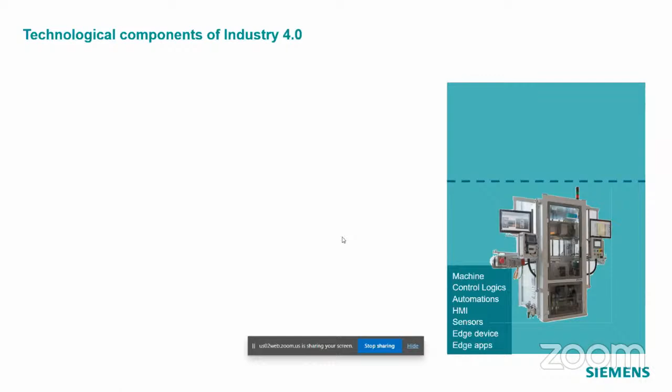We put sensors so that we gather the data - a very simple one can be vibration data, temperature data, or alignment data. There are different kinds of sensors available catering to different requirements. The sensors, when they capture the data, the data needs to be processed, otherwise there is no benefit of capturing this data.

So there is a term where I can collect this data through sensors, and there is a cloud concept. I can collect that through some device and stream it to the cloud, where a lot of apps are sitting, which will analyze this data and give me more insight into my equipment.

But now the thing has come - I will get the trends, but suppose I want to make use of this data and take certain critical decisions near to the machine, maybe on the machine itself. So I will use my pointer - you can see this is the edge device in this particular equipment. It's a data streaming and edge device sitting here.

So you identify your decisions - some decisions critical to the machine should be near to the machine, and some data will be used for the trend. Suppose I have the same equipment on 5 ships, I will collect from all 5 ships and map those equipment performance to find out the trend and take corrective actions.

So some decisions you have to take here, you have some computing device here, on which you can select data which should be less in size, because you can't put a mainframe or big computer here. So you have to balance between computing power and KPI - based on that, you decide how much data you will collect and what kind of decision you will take there. So sometimes when people talk about a digital twin, they only talk about this, which you can say is a data twin - a twin created out of the data which is produced by the equipment.

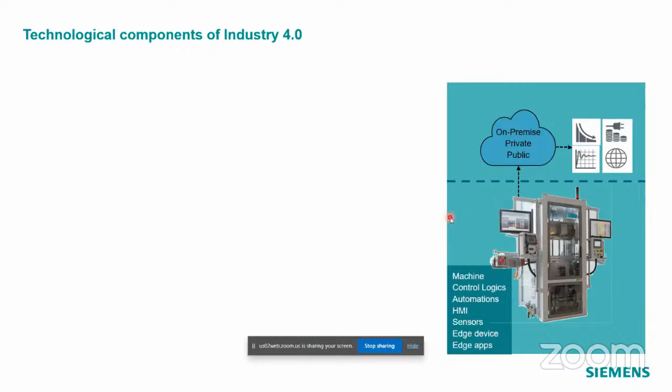Similarly, same equipment - as a manufacturer, as a shipyard, I may also be using many machines like cranes and others. So the same technology I can apply there. That is one part of it.

The second part is, if I have this 3D model available, there are 3D planning tools available. We call it virtual planning. So you can do process simulation and see whether the reachability is enough or the posture is good enough.

With this posture, how much a worker can do, and there should be rest for a worker because there is fatigue. In our case, a welding posture of an operator is difficult because of the nature of the compartment, or there is not enough exhaust available, so you have to plan that after every half an hour he has to come out.

All those kinds of process simulations you can also do. So this is basically your data twin, this is your manufacturing twin. And the last is basically my design twin, engineering twin you can call it.

Engineering twin is because today we are not talking about 3D static models. Now these models are mimicking the behavior of actual machines. How could they do this? They do this by leveraging different kinds of simulations.

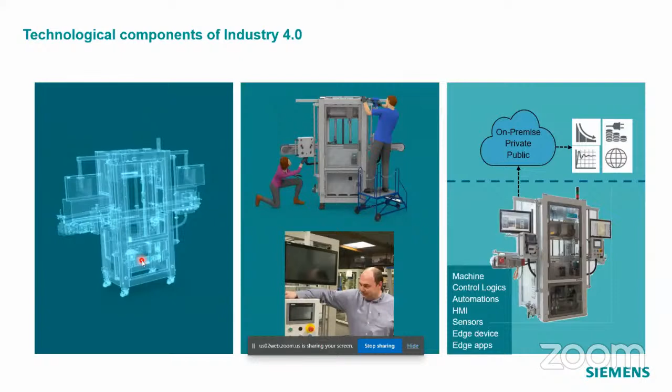Simulation software has become very strong, they have become faster. There is also a possibility to run multi-physics together to understand - instead of running physics solutions in isolation, now you can run them together like a real-time environment. So now these are not static, they are becoming dynamic, capturing the dynamic behavior.

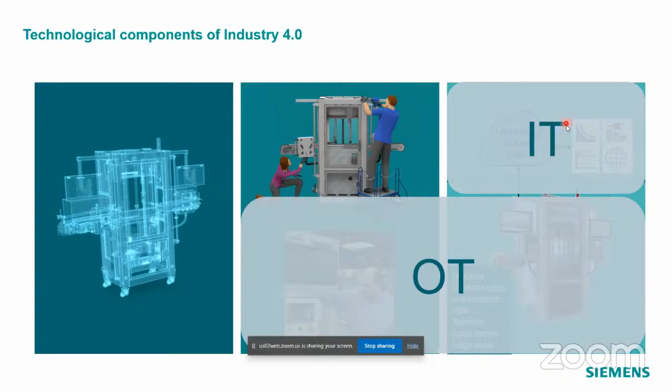Overall, if you look at the bottom part where we are talking about machines and capturing data from machines, it is all about operational twin. The data which you collect on cloud and process - this is called information twin. And your virtual planning and the rest is basically your engineering twin.

So now twins also have a variety. Many people are talking that digital twin only from data doesn't help, because it gives the behavior of the current system. But if I have to do what-if analysis, let me give you a simple case.

Suppose you have a system and a particular pump has now gone bad, and you don't have an exact repair replacement in your stores, because our vessels are designed for 40 years, 50 years. Over time, things have changed. Now I have to see some other part in the market, some other pump which is close to this spec. If I put that into my system, how will it behave?

The data twin has a problem there. So then the engineering twin comes into picture. Since you have an engineering twin available, you can replace that pump.

You put this pump, put all the behavior given as spec by the supplier, and then put it inside your system and solve the complete system to see what will be my performance envelope after putting this pump. With that, you can put a new SOP for your operation team. So that is the way the engineering twin's role is increasing now into a digital twin space.

I hope I tried my best to explain this thing, and then I will take some of this engineering twin pieces and operational twin pieces and IT in the subsequent slide to give you more insight into it.

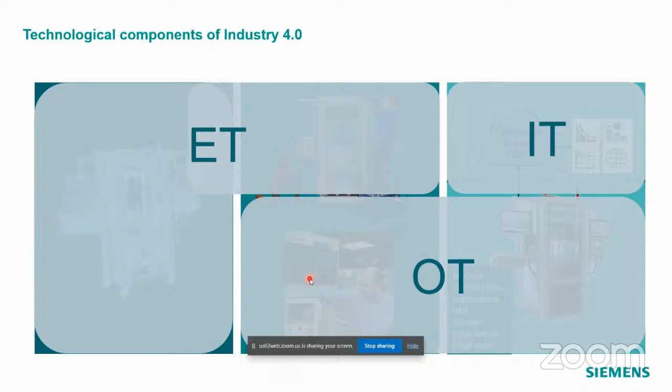Once it comes to Siemens, we see the whole digitalization game is based on collaboration. If you don't have a collaboration platform, we are digitalized today as well. So the first thing is the collaboration platform which we bring in, on which all the tools used for virtual products.

It can be a design tool, it will be a 3D model, it will be a 1D simulation tool - I will highlight 1D simulation tool in a couple of slides, maybe CFD, structure analysis. So all this thing will go as an input for your virtual production.

Since I'm running this complete thing in virtual production, there are certain observations which can be sent back for verification and new specs can be released. This is all in the virtual world, so I'm not yet invested in my physical thing. So till the time I'm in the virtual environment, I can make changes with less cost. Then once it is proven, it goes to real production.

Again, there may be some issues and validations, and then I have to give the new commissioning process. As a result of this real production, I'm basically delivering my actual product to the industry. And this product will also have certain technology which I have used in real production, like AI, ML, and these things, because finally the solution is womb to tomb, which is most commonly used now.

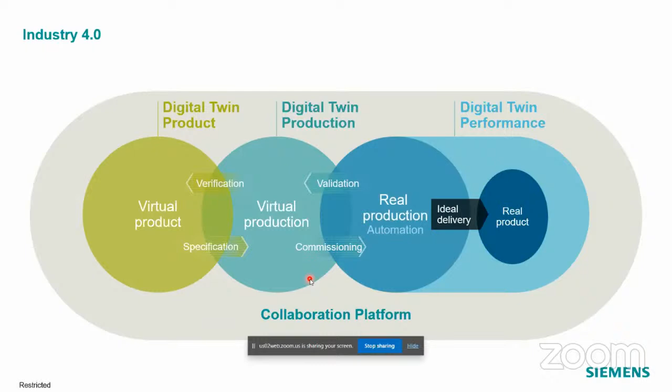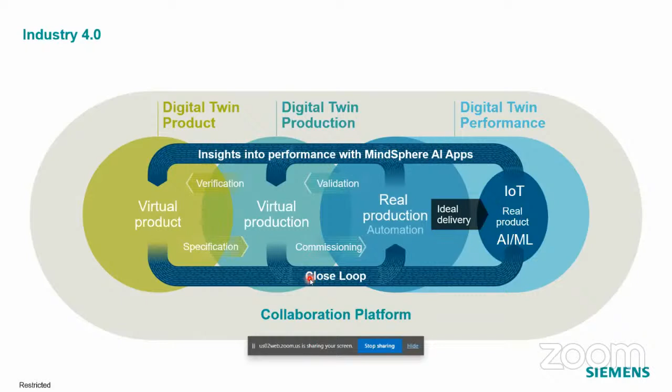And so on this, I will have this data highway. It's giving me a closed loop environment. So that is the vision. Let's decode each area, okay.

So when I say collaboration platform, there are different—this is just a suggestive list of solutions. Document management, these things we already know, program management is there, data management. Material management is basically—now many of you may be knowing that...

I use the term womb to tomb. So when it is going for scrapping, you should know how to handle this material, what kind of hazardous material was used at the time of construction. So that information throughout the life cycle you have to maintain, and that also you can maintain on this collaboration platform. So it gives more control on the program, visibility, and collaboration.

So post that, virtual product comes into picture, where we all know that ships and marine vessels are very complicated. They have, by nature, by beginning, a multi-domain engineering, and those domains are increasing. So it's mechanical, electrical, electronic, software, all hydraulic, pneumatics—so there are so many kinds of systems there.

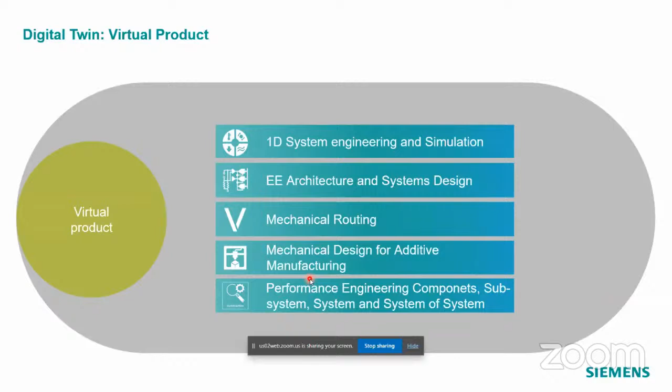Okay, so all this will sit on this collaboration platform, because they are not isolated—the need is to connect them. Okay, so how a typical process works in design, that I have tried to capture here.

So it starts with basically requirement. This collaboration platform gives you a way of managing your requirement, because your requirement goes through so many iterations during the concept design and the basic design level, that for a complex program it really becomes tedious to find out when changed, what changed, and why changed. So all this can be maintained here.

From requirement, our experts work on the system breakdown. So now there's a tool to create the system breakdown, and there's a tight integration between requirement and system. Tomorrow, if your requirement is changing, you can trace out which particular system will get impacted, or multiple systems will get impacted because of this requirement change. That's the value—we are moving from manual process, so there is a tool to take care of it.

Once my system elements are finalized, I have to size them, right? So in system engineering, here we use a tool which I will touch upon in a little detail because it is interesting—it is called the 1D simulation tool. Because our systems are, as I mentioned, multi-domain, it has all kinds of engineering here.

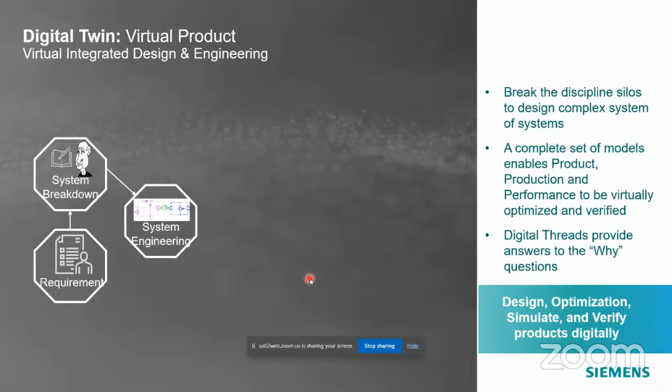So we want a tool even before investing in 3D, because 3D is the luxury. At the basic design level, I have very few information; at concept level, even fewer information. So how to leverage technology to have better bidding, to win the bid, we have to be accurate technically, so that we can estimate things accurately.

And once my system engineering is done, where I have done all my parameter sizing, I can take that into different 2D development solutions, like piping schematic can be developed, electrical schematic, and the concept level design of a ship. So I will talk about it.

And then all these things travel into detailed design, because finally we have to create the hybrid BOM composites, where all this—outfitting, structures, piping, electrical—everything is coming together. And as you build more realistic 3D data, in parallel you can have magnetic field interference analysis.

Structural analysis is very common, industries using CFD. Probably I can do certain testing virtually.

So on this platform, the typical problem is when I have a system which has 10 components—2 may be internally designed, 8 I have to source from the market, but their receival at the shipyard happens at different times. So when I'm receiving at the factory, I only test that equipment, but most of the problem comes when you're integrating this thing together. So with virtual testing, what I can do is 9 components can be virtual and 1 component can be actual.

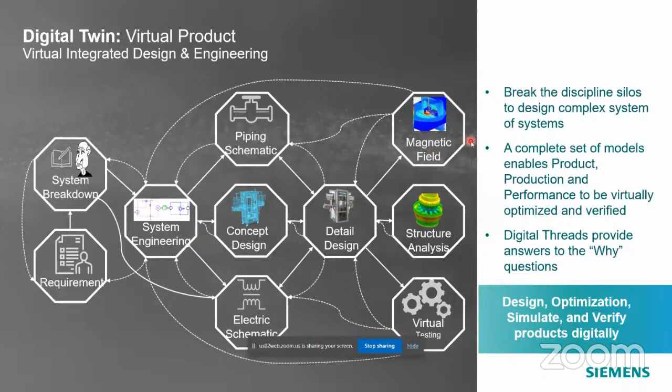I can put all the sensors and do this hybrid testing, so I'm testing the individual equipment as well as maintaining the testing at the system level. That is the kind of technology I can apply, and all these are connected through digital threads. Every asset is traceable right from the requirement - I can see which system is getting modified, whether parameter sizing needs to be redone, where it got consumed. From this consumption I can check which analysis I have to rerun and validate that behavior. So it's complete traceability you get out of this.

So let me take one small case. For this 1D system, we have a tool called Amesim, where you have a physics model and a library of all this. I can have a basic resistance model of the ship, a propeller, transmission, and a mission profile. Very detailed engineering is there - I will give you a couple of glimpses.

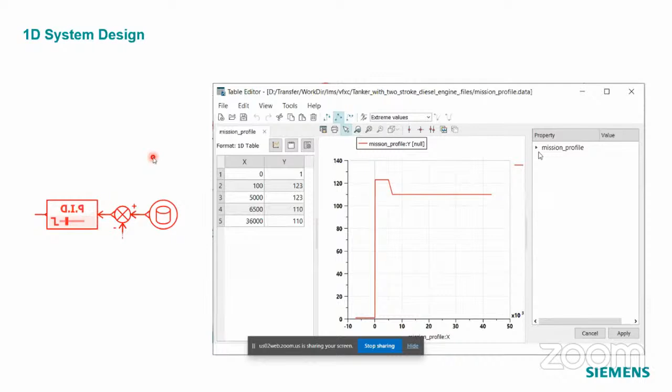So this is a mission profile. Any testing has a certain mission, right? So I just go full throttle and then come down a bit and stabilize. This is the mission which I want to run. This is basically your control system - what plan you have to test. Based on that, you will decide your mission.

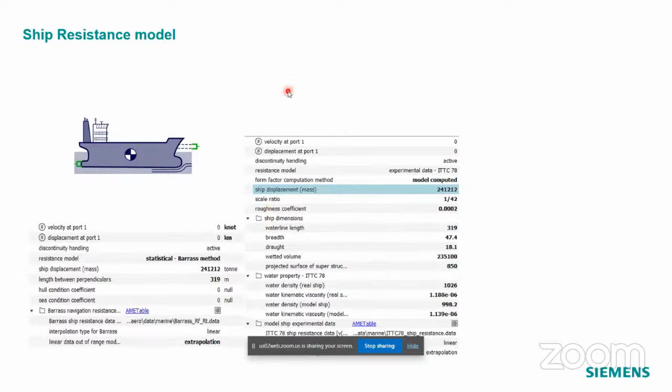Then, as I mentioned, I don't have any 3D model. But there are certain physics models available, like the statistical Barras method, where I just give the tonnage and the length between the perpendiculars, and it gives a fairly good result. Or if I have more data, I can go for experimental data - the ITTC 78 model is available out of box in our tool. Or with more information, the Holtrop and Mennen model, where I can define bulbous bow and all these details depending on where I am.

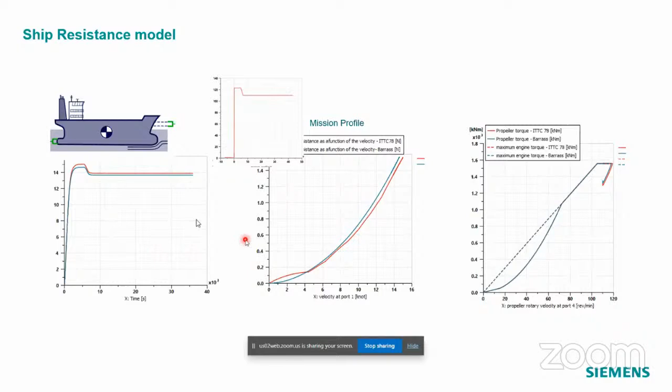Similarly for the propeller, I can create a virtual disk, or a Wageningen B-series based model, or a performance based model if I have all the coefficient values available. If that's not there and I have actual propeller test data available for the same propeller I'm going to use for my next ship, I can even take that tabular performance or graph as a performance propeller model. So it's a very flexible tool.

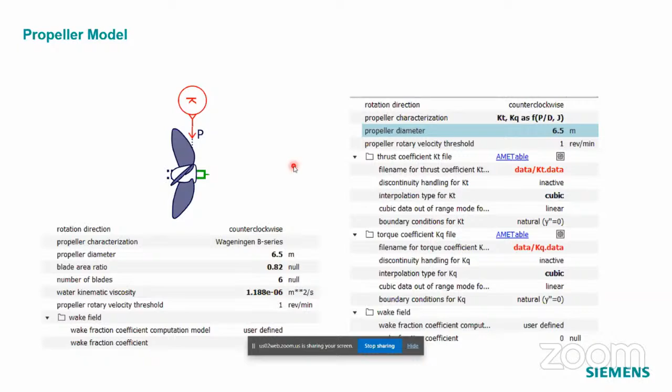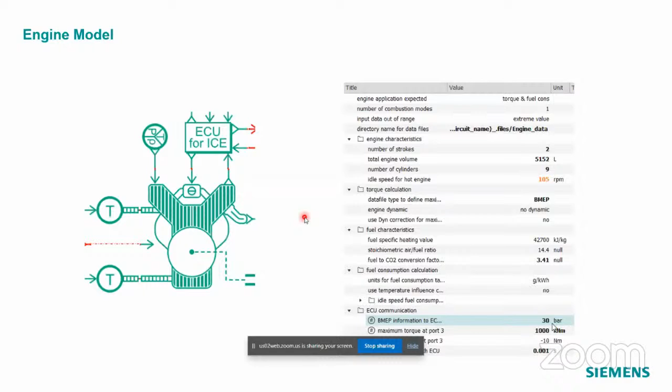Same way for the engine - you can define a very detailed engine with a complete mathematical model. With this I'm putting everything together, connecting them. There's a mechanical system transmission, these are all signals, there may be some hydraulic components. I'm showing you one example, but you can build any kind of system in this tool. With this, you can size your components - that's the value we add.

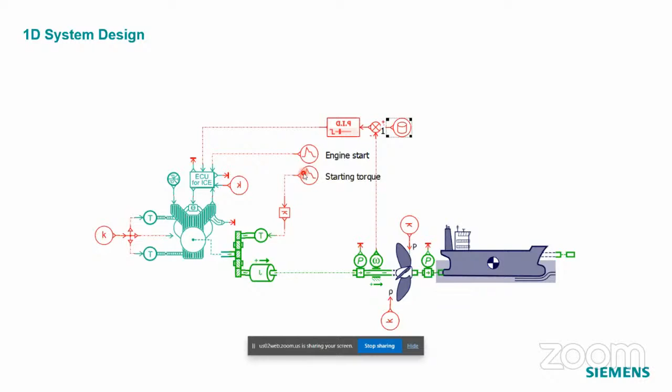So once you have solved that, you create your hull surface. This hull surface can be parametric, for the parameters which you want to play with. Today these things are done by our experienced naval architects, purely based on their experience. But these are the tools which will help naval architects try more options. I can try that with different models - with one model I'm creating hundreds of options, and I can plot them against the constraints.

So we have an optimization engine called HEEDS. One thing I want to make clear - Siemens solutions are all open solutions, but I'm using all internal solutions here for designing. I'm using NX, Star CCM is a Siemens solution, and HEEDS is also Siemens. But if you have other solutions, even those can be integrated - our optimization tool integrates 128 tools.

So there's a model which is getting modified, taken into Star CCM for validation, and then it's plotted. With this, you have more options to choose from for the optimum design.

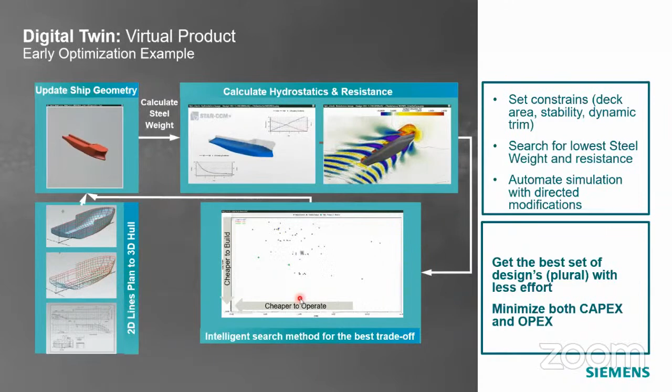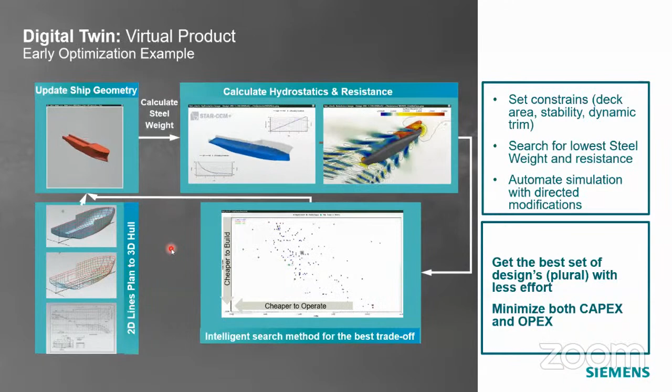Best design you can't choose because there are so many constraints you have to balance. So this is one example in the design domain of how this connected technology is giving you more value out of the system.

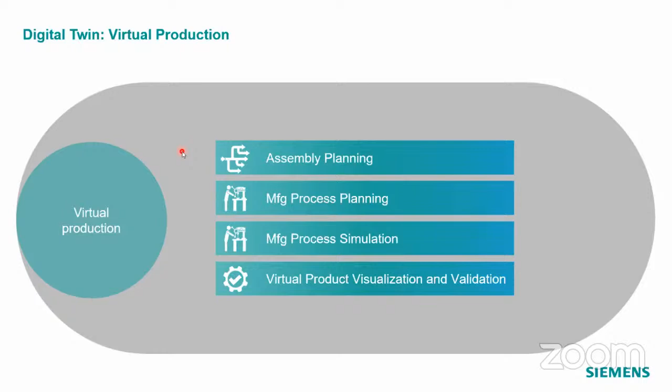Next example, I will take virtual production. This is one area where some of the big shipyards have taken the lead. There are so many things which we do today as Excel sheets or ad hoc processes. There is a process because by experience you have gained knowledge, and based on that knowledge, SOPs have been created and the systems process has been created. But how can we use the technology here? In one slide, I will try to explain.

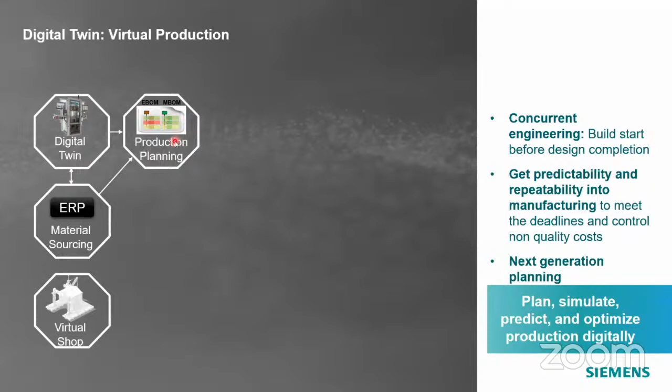I will show one example here. From the digital twin, I get my engineering BOM. From ERP, I get the material status. But for MBOM, that is manufacturing BOM, you may call it palletization or creating volume creations. You break the complete structure into small volumes, maybe fabrication volumes and assembly volumes. But you want to track, like, what component of the engineering BOM got consumed, where it got consumed. If it is changed, you can trace it in MBOM, which particular manufacturing sub-assembly got changed. So this traceability comes into picture.

When this package is done, you will be creating your steps, manufacturing process, bill of process, where you define for doing this, what drawing, what 3D model, what material, what machine, what man, what skill sets of man are required, what tools you will consume. So all this detail is packed here.

Now, not for every packet, but maybe some complex or heavy packets, you may have to do process simulation. Process simulation can simulate man, it can simulate machine. You can see how I will lift this particular object, take it to another position, what kind of time it will require. All this analysis you can do. If it is heavy manual labor, as I spoke about the welding posture, this particular tool also checks the stress on the human being, the fatigue on the human being, and with that you can create very safe processes.

Once this is all done, I will create my manufacturing schedule out of it. Now the schedule is ready, all other information is there. I can load it. Other important thing is the build sequence. We all know that the build sequence is very important for us. Once this is done, I can load this schedule on my virtual shipyard, and I can run it virtually.

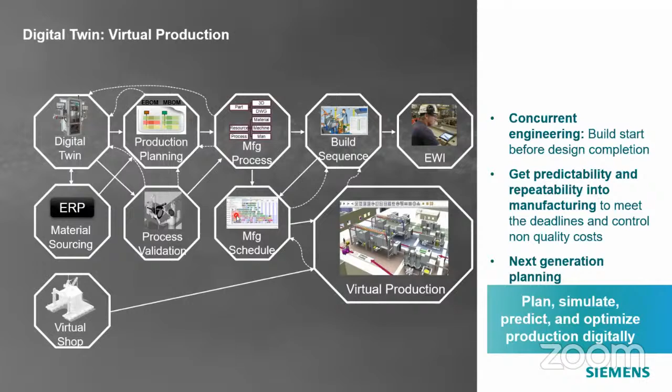And since you have created so much data, with this data you can very easily create the electronic work instruction, which can be loaded on a tab, and people can use the industrial tab in the factory to execute the task. And again, it is all traceable down to the digital twin. So suppose there is a requirement that triggers a change, that can be traced up to any location in this, whether it has an impact on the manufacturing process itself, you can understand that. So probably it will give a way to bargain better with your vessel owner or the contract OEM for the cost of the change.

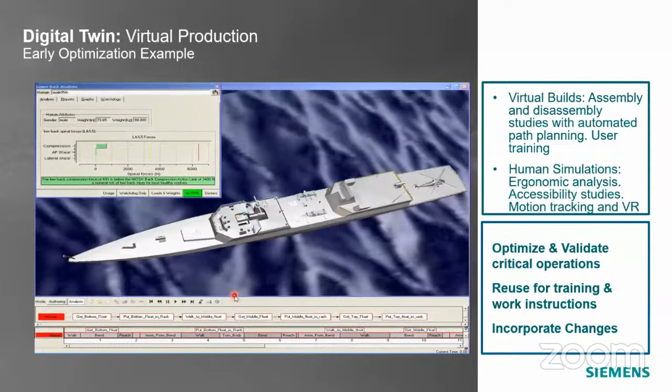This is one example I just wanted to show you. It is a simple example, like a lady and a man, they are doing some work.

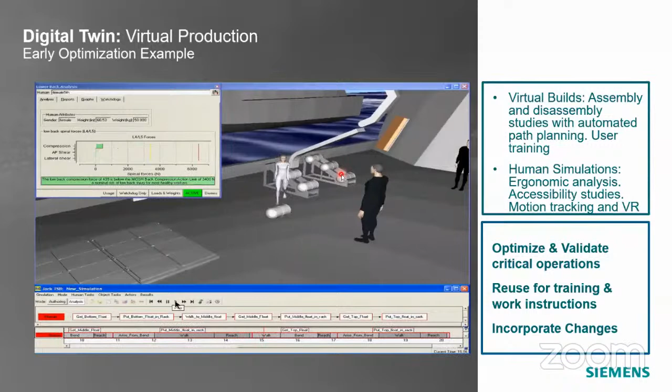This tool helps find out what kind of load is coming on the body. When a tall man is lifting, there is compression in his spine. The same work done by a woman, who is smaller with less height, shows she is not finding any problem. This way you can find out what kind of percentile or skill, or how to make this safe by changing your process. This is just an example to show the capability of the tool.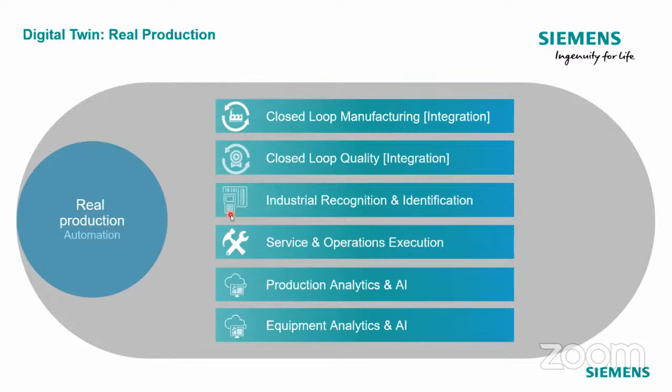Once you're done with virtual production, the next stage is real production. Here the technology we use is closed loop manufacturing and closed loop quality. There is so much inventory lying around that traceability itself is a big task, so we provide a solution for industrial recognition and identification with RFID scanning, whether it's metallic or other things. This enables service operation execution, and with this data I can run different types of analytics on equipment as well as overall production.

One area I will explain: your schedule comes from planning, but when you are executing, new constraints appear. Many people who have worked in the workshop can relate to this. Every time in the workshop we have different kinds of constraints, and we have to solve and see which other activity we can take forward with this constraint. So we have a solution for that, which is a critical chain based solution.

Now you have an execution plan available. From planning schedule, you have created your execution plan, so you can load the operation onto manufacturing operation management, which can be used in manufacturing execution, whether it's man or machine, depending on the requirement and the kind of systems you have. This can be decided, and the kind of information you want to capture, right from human to machine, can be planned accordingly. There is also a quality plan already published in the operation management.

There will be inspection stages, and once you close them, depending on what kind of constraint you want to put, like if all the quality parameters match, only then should it go to the next stage. All this kind of planning can be done here.

On top of that, we have a manufacturing intelligence engine, which based on the KPIs of that particular department, can create different dashboards to give a good understanding of the whole operation, which is very important because it's such a complex environment. We should know what our focus area is and how we are doing against that.

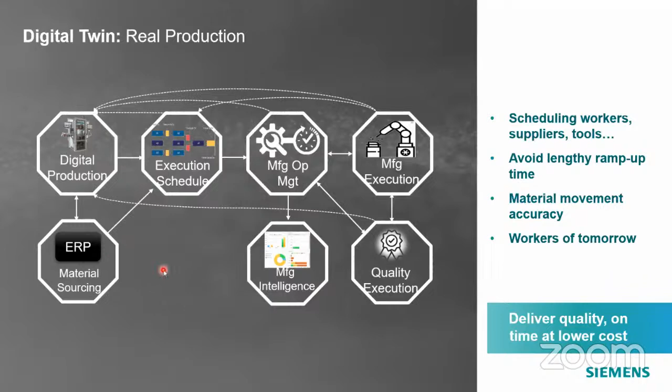These are the solutions we have for real production, and again it's connected to design. For example, suppose we are parallelly doing two ships. Now a change has come. With this connectivity, I can find out I can't change ship one because it's already executed there, so this change is only available for the second ship. Maybe I have to talk to the OEM that it's already done, and if they want to execute on both, then I have to rework. There may be a decision to leave it wherever it's already done, but modify the other ship. So all this information can be captured real time at the moment of making the change decision.

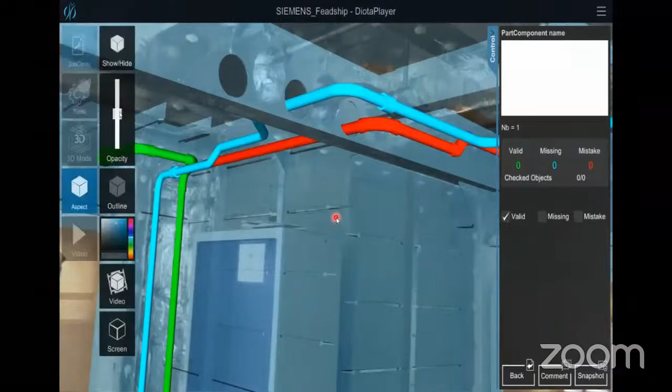One example of virtual and real world, this is something we did for Feadship, one of our clients. You can see this pipe - it's a virtual pipe, and he is standing in the actual structure, because structures have a lot of tolerances due to the nature of welding activities. Before bending the pipe, he wants to see whether the design pipe will fit inside, or if there is fouling with the cutouts. Here I am merging both virtual and physical worlds together by superimposing the virtual pipeline onto the actual structure.

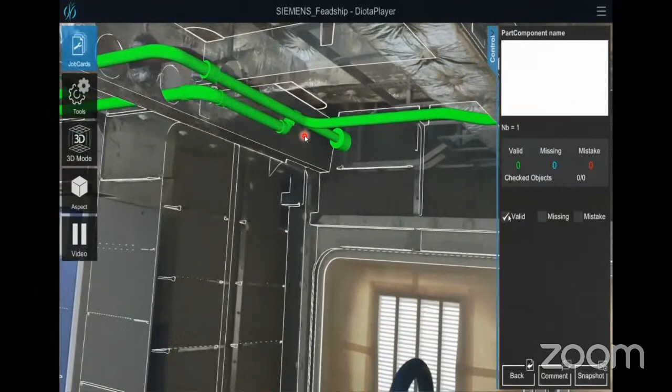There is a company called Diota that Siemens worked with and brought out this solution for that customer. I thought this was interesting to see how these two worlds are coming together - one application of how you can do this.

As I told you, there are a lot of technologies used in your actual production that can be applied to the real product too. Analytics can go there, and Industrial Internet of Things is common - you can apply it on your machine as well as equipment given by supplier, or things developed in-house. The supplier will give only the equipment level sensor system, but as a designer or design house, I have to give the system level solution, adding systems on piping and other components.

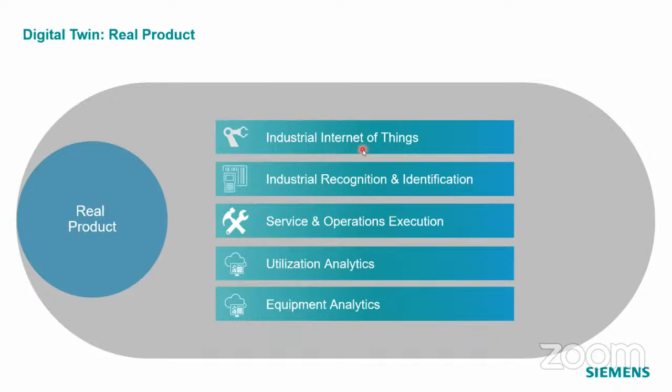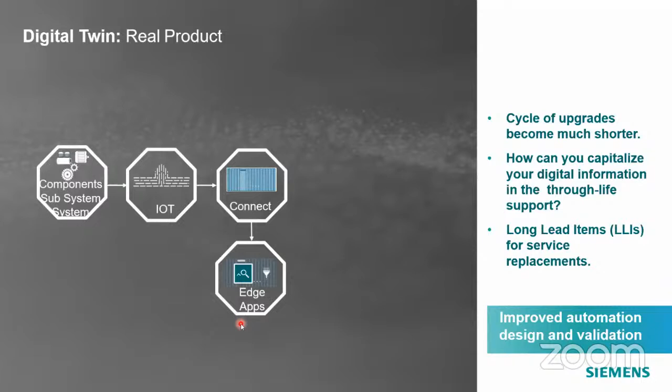So how does it work? You have all your equipment, your ship, on which you first put the IoT infrastructure, basically connectivity, and then there's a data gateway where all the data comes. Some data goes to the cloud, and some comes to the edge app on the ship. There are a lot of options based on requirement - if it's a defense ship, I don't want to stream my data outside, so I segregate non-classified data. I can create a hub inside the ship, on the machine, on the ship, or on the cloud, depending on the KPI, and different apps will give different insights into my system.

Since I'm collecting the data, predictive maintenance comes into the picture. Predictive maintenance is a very small part of this solution - there's a lot of other value coming out of it. Service lifecycle gives value by making sure I don't replace parts before their life is over. So instead of time-bound replacement, I can move to a model which is performance-based replacement, which reduces my service cost. All these possibilities are there.

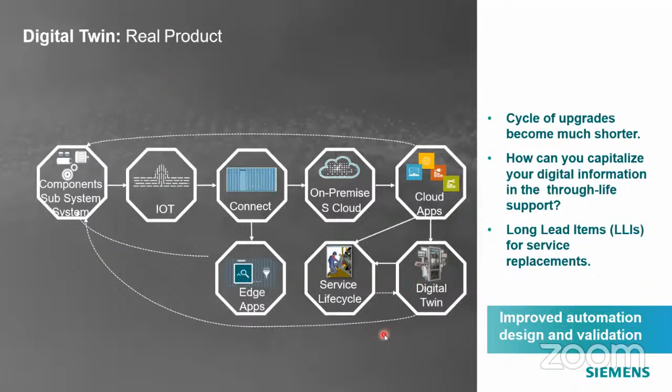This is the scenario I was telling, that pump story - like this pump is not available, so if I have to put a new pump, I should know the impact of that on the system. All these things work together, and using that I can give you better prediction on this.

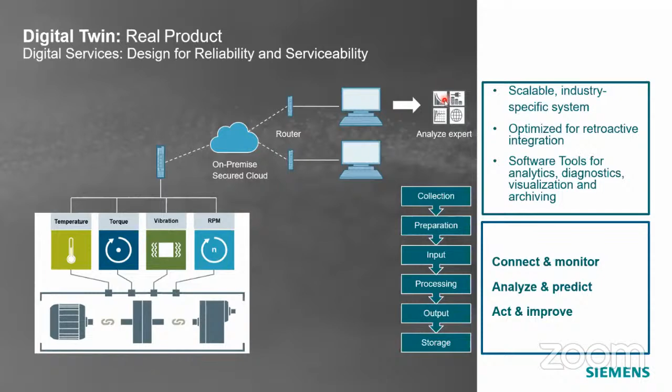This is a little inside look at how we process the data. These are the equipment where various kinds of sensors are, there are many more - these are representative ones collected over the cloud. Then there are processes like collection, then we prepare that data, input is created for further processing, output comes which is stored, and this output is connected to different plots. This is the way the whole IT twin works.

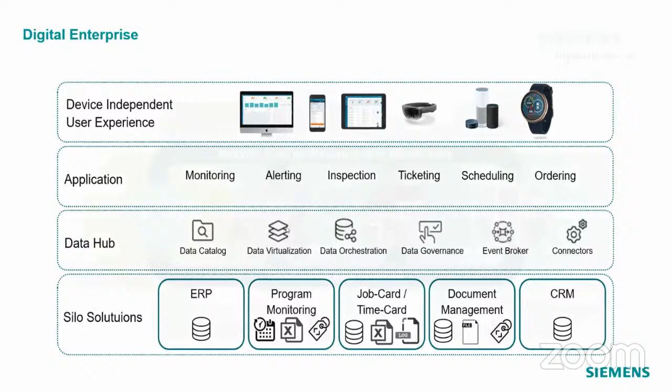So this is digitalization. This is Industry 4.0, which talks about bringing things together for better insight, and this insight will trigger the next level of efficiency in the market. So that is the point I wanted to communicate today.

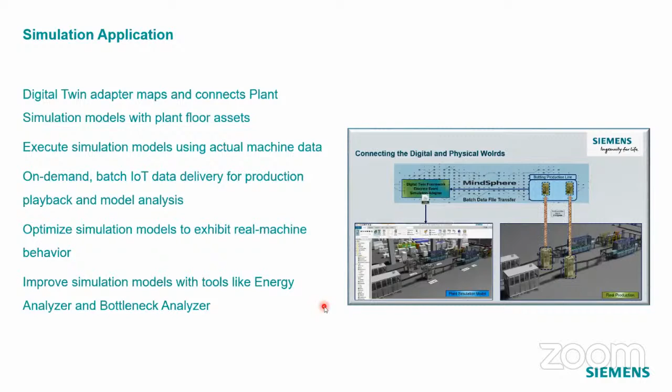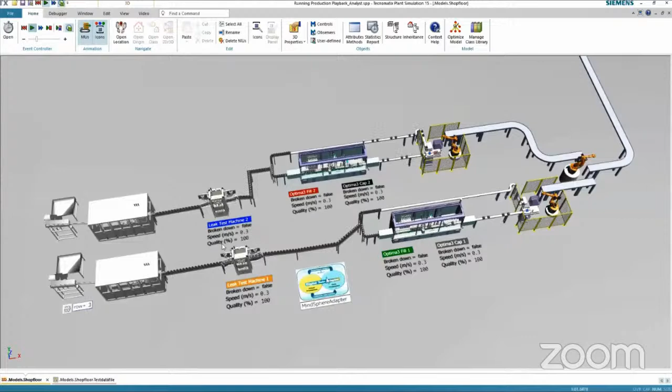This is one example - again I am showing where physical data, how I can use it. This is not ship industry, just for your technological insight I'm showing you this. This is a case where this is my plant simulation, just a virtual prototype. In this, I have a complete plant and an IoT-based actual plant. Now some accident has happened, and I have to capture that particular time and see what happened that day.

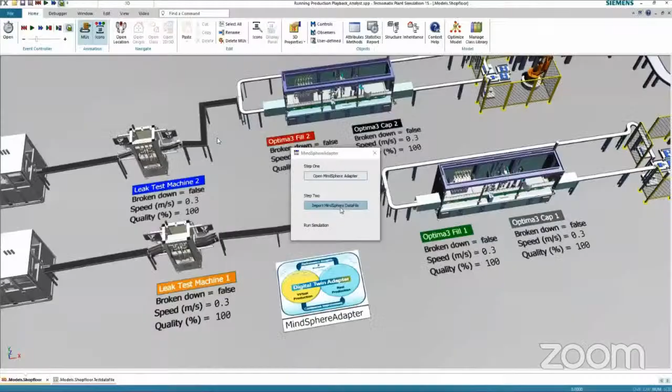So I can connect to my actual environment, I can select that from the factory - you select this start time and this end time. So I am selecting a start date. All the data is there because in real time that accident has happened and gone. I can't investigate directly, but here I have an advantage because I can pull that data, load it into my virtual environment, and put more virtual sensors here to find out what exactly happened, so that I can correct those things.

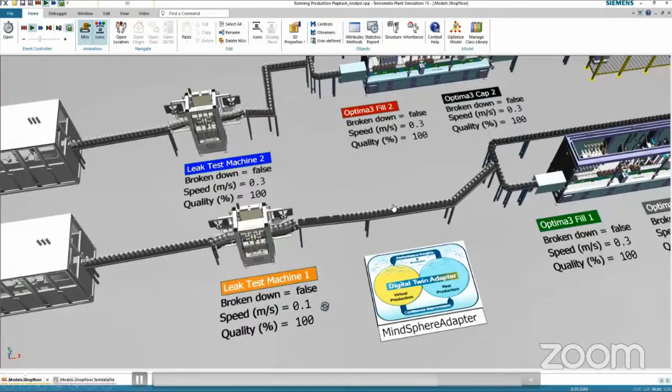So that is one example which I wanted to show you. Although it is not for the ship industry, it will give you good insight that similar things we can apply on other critical systems if required.

So one last point - when we say digital twin, it's not that your actual machine is running and the 3D model you will see running in parallel. What happens is when you're doing the actual process, your constraint boundaries are dynamically captured. If I apply this dynamically captured value on my simulation models, it will take computing time, because if it is CFD related simulations, the solving time is a computationally costly thing.

So there is a concept called reduced order model. What we do is take all this simulation - there is a technology - in fact after automation there was machine learning, and now it's called deep learning, mainly neural networks. So what we do is from this simulation, we create a very fast model based on the neural network by reducing the model order and calibrating them against the actual data.

And once it is proven, this fast element is so fast that it can also be burned inside your embedded chips. It can also go inside your control systems. And that way we are bringing all the knowledge of your engineering twin inside your actual physical model.

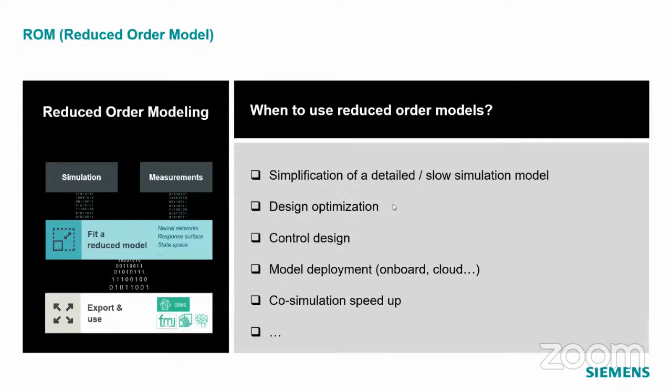So we also have a solution which helps with reduced order modeling capability. So you have a simulation from there, you can create this, and these real-time models have a lot of promising applications in our industry, even in control systems.

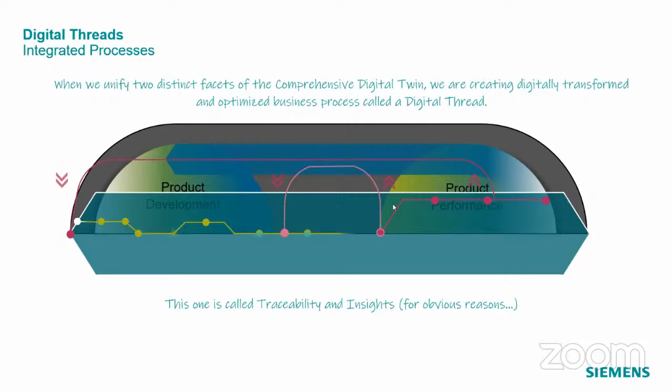So what basically we did in this, from product performance to product development, everything is connected, and this gives me a closed loop. So now because of this, I have more insight into the performance of my product, so that my future products will get benefited out of this.

So that's the complete picture, and this whole platform is scalable, right? If you have some new technology tomorrow, you can very easily accommodate it because it has an open and scalable environment. So that's the point I wanted to convey. With this, I conclude my presentation, and I'm open for questions.

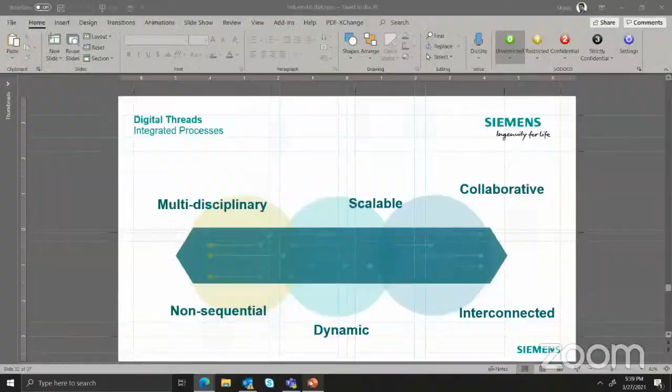Dr. Rahim, yes please go ahead. Mr. Manoj Singh has not given any concrete results, application results, cost saving and all. He has only dealt with the concept. My concern was whether by applying this system, I would make the construction of the hull costlier. That is the point mainly. Do you have any results where you have saved time, saved cost, made things competitive? Technology apart, this is the point.

Thank you. Okay, so Mr. Singh, do you have any data of actual implementation in some of the shipyards? May not be in India, outside India, that way you can show that there is actual saving in cost.

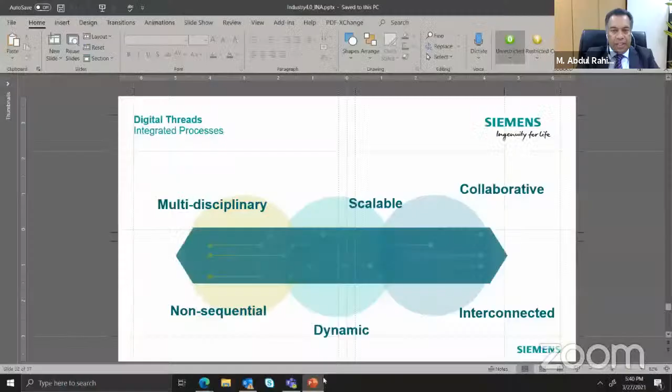Sir, I'm sharing my screen. Is it available to all? Yes, now you can see it, yeah. Yeah, so actually in the same presentation I had these two things, but just for time purpose, I didn't share that.

Newport News has given this input to us - they will be saving 15% on their Ford class aircraft carriers by using our technology, and they are quite open in sharing that they are on Siemens technology for their digitalization effort. The second example is a small shipyard, Flensburger in Europe, which experienced 100% productivity improvement. I have many case studies, I just added two as a backup in my presentation, which I've shared with you. So this is some of our customers' experience with our technology.